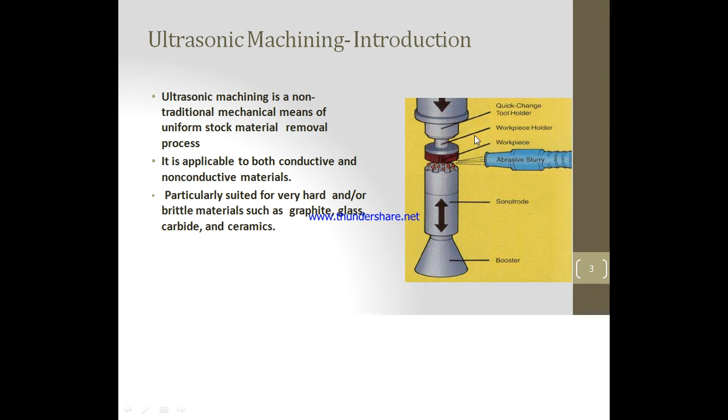Look at this. This is a tool holder. This is the workpiece holder, and this is a workpiece. This is abrasive slurry, which can be placed between the workpiece and the particular job. These are the boosters. This is the sonotrode, which can vibrate in the upward and downward direction. This particular principle is used in ultrasonic machining. How it works and the details of this principle you can see in the subsequent slides.

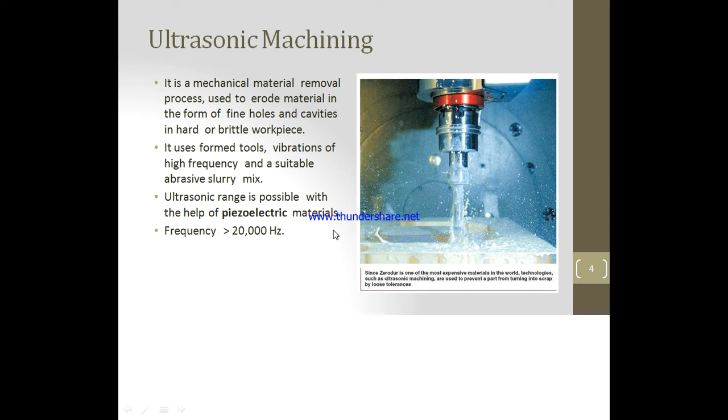So it is a mechanical material removal process used to erode the material in the form of fine holes and cavities in a hard or brittle workpiece. This particular tool holder we also call a vibrator. It uses formed tools, vibration of high frequency and a suitable abrasive slurry mix. The ultrasonic range is possible with the help of piezoelectric materials. This frequency is near about 20,000 hertz.

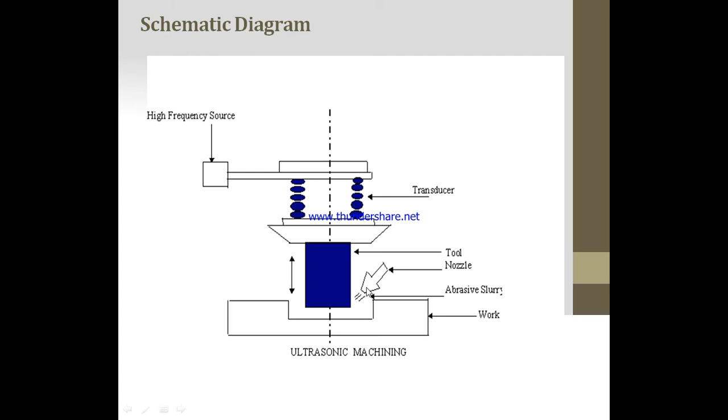So this process is an impact erosion process. For this erosion, we use abrasive particles. Abrasive particles are used for cutting the material. The abrasive particles in the slurry or fluid help with the cutting. Material removal is nothing but an abrading action of the shaped tool, generally of the type of cavity you have to create. It is directly related to the shape of the tool.

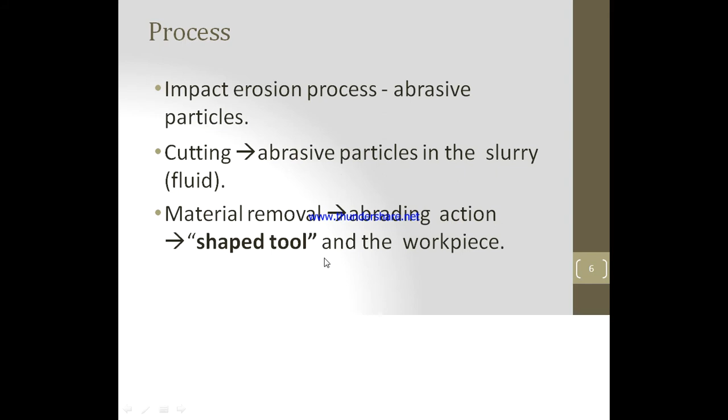Okay, so due to this high frequency vibration, the process is performed by a cutting tool which oscillates at high frequency, near about 20 to 40 kilohertz, in abrasive slurry. The tool is gradually fed with a uniform force. The high-speed reciprocation of the tool drives the abrasive grains across a small gap against the workpiece. The impact of the abrasive is the energy principally responsible for material removal in the form of small wear particles, due to the high-speed reciprocation of the tool.

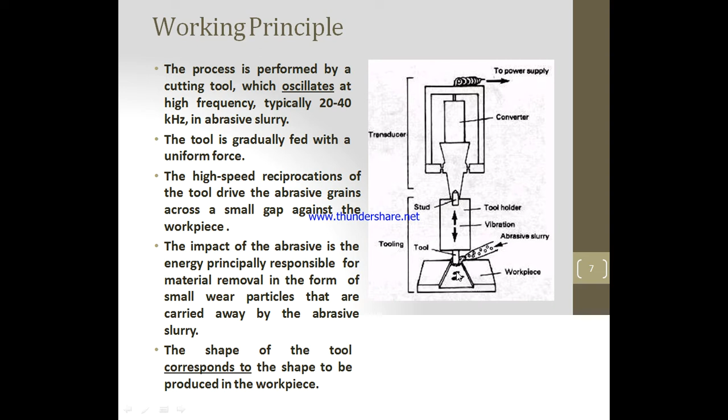The high impact of the abrasive is responsible for the removal of the material as small wear particles, and those small wear particles are carried away by the abrasive slurry.

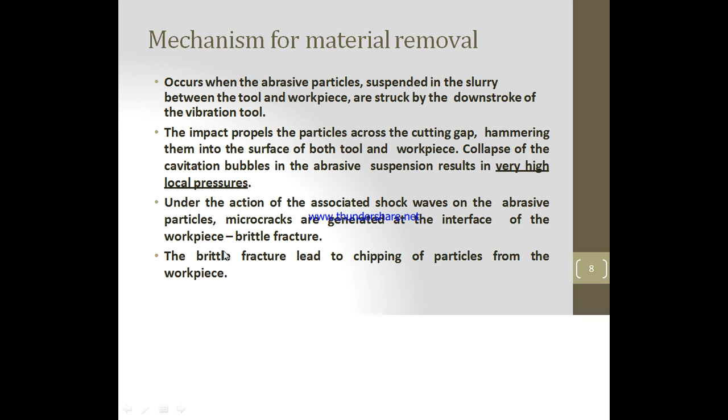So when the abrasive particles suspended in the slurry between the tool and the workpiece are struck by the downstroke of the vibrating tool, the impact propels the particles across the cutting gap, hammering them into the surface of both tool and workpiece. Collapse of the cavitation bubbles in the abrasive suspension results in a very high local pressure. Under the action of this associated shock wave on the abrasive particles, micro cracks are generated at the interface of the workpiece, that is brittle fracture. The brittle fracture leads to chipping of particles from the workpiece.

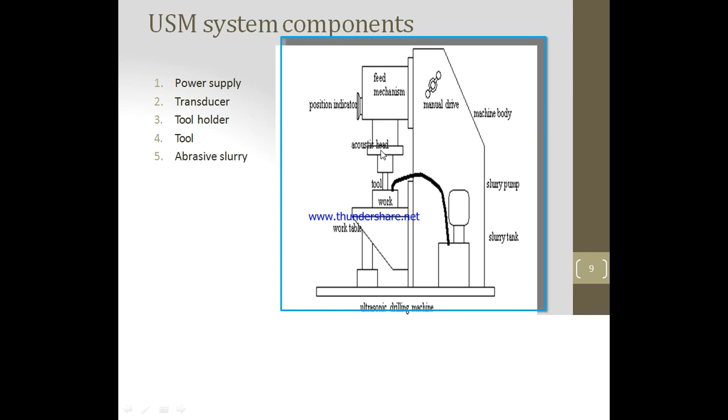So ultrasonic machining system components, the first component is the transducer. This is the transducer which converts the high frequency to the high frequency vibration of this particular machine component. To obtain a high amplitude of vibrations, the length of the crystal must be matched to the frequency of the generator, which produces the resonant conditions. So number one is transducer.

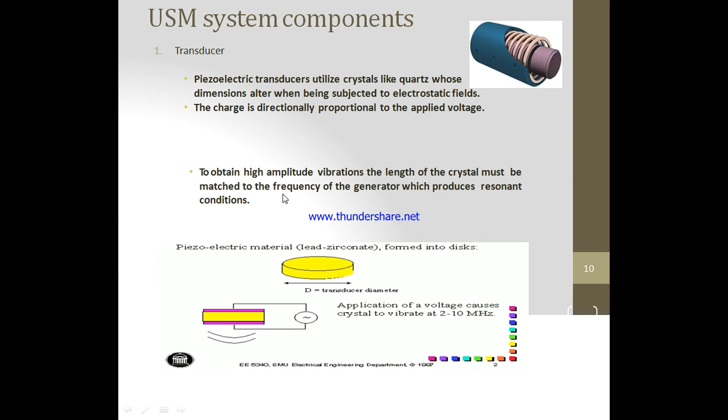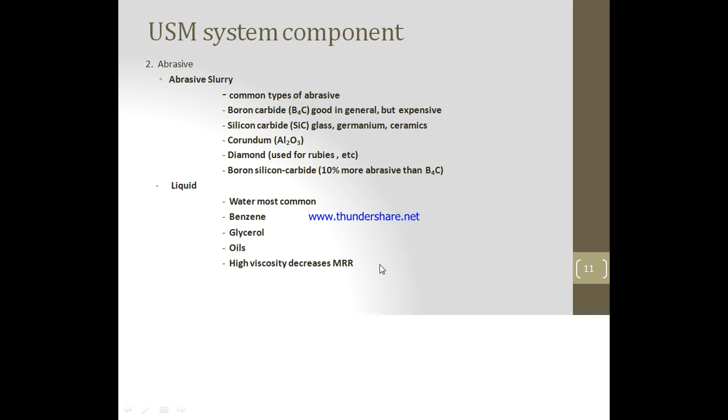Number two is abrasive slurry. A common type of abrasive is boron carbide, that is B4C, good in general but expensive. Silicon carbide, glass or germanium ceramics can also be used as abrasive slurry. Al2O3 corundum is also used as abrasive slurry. Diamond, which is generally used for rubies, and boron silicon carbide, that is 10% more abrasive than boron carbide. For liquid, we can use water, most common, benzene, glycerol, and oils. Oils are high viscosity oils.

So ultrasonic system components, next is tool. The tool material should be tough and ductile. Low carbon steel and stainless steel tool materials can give good performance. Tools are usually 25 mm long. Its size is equal to the hole size minus twice the size of abrasive. Mass of tool should be minimum possible so that it does not absorb the ultrasonic energy. It is important to realize that finishing or polishing operations on the tools are sometimes necessary because their surface finish will be reproduced in the workpiece. Tool and tool holder are often attached by silver brazing.

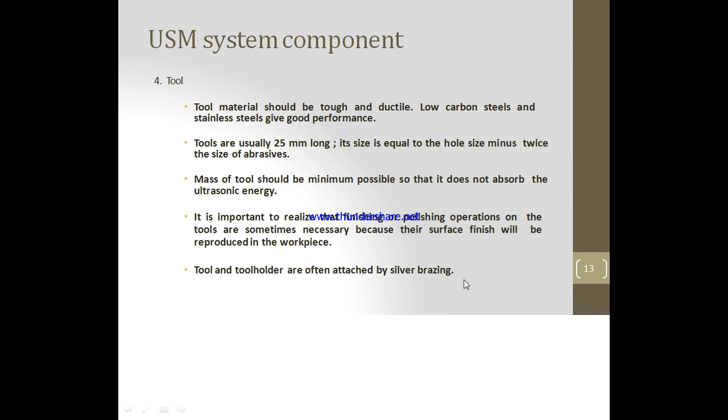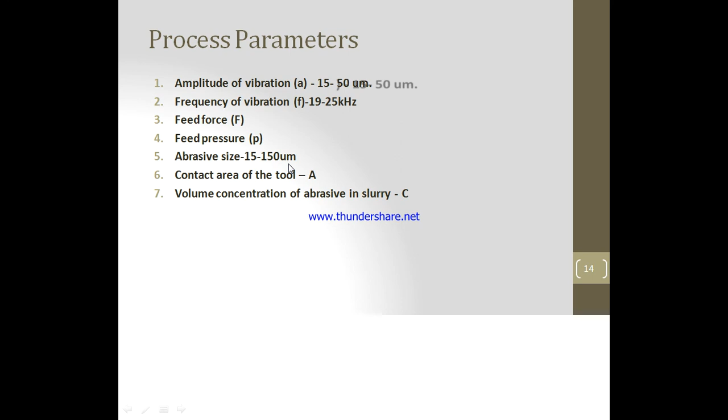So what are the process parameters to be checked in ultrasonic machining? Amplitude of vibration: the more the amplitude of vibration, the more and faster the material removal. Frequency of vibration, generally about 19 to 25 kilohertz. Feed force, feed pressure, abrasive size near about 15 to 150 micron. Contact area of the tool. Next is volume concentration of abrasive in slurry. These are the factors on which the entire ultrasonic machining process depends.

So what are the applications of ultrasonic machining? It can be used for drilling, grinding, profiling or coining, piercing of dies, etc. Welding operations of all materials which can be treated suitably by abrasives. It is used for machining hard and brittle metallic alloys, semiconductors, glass, ceramics, carbides, etc. It is also used for machining of round, square and irregular shaped holes and surface impressions.

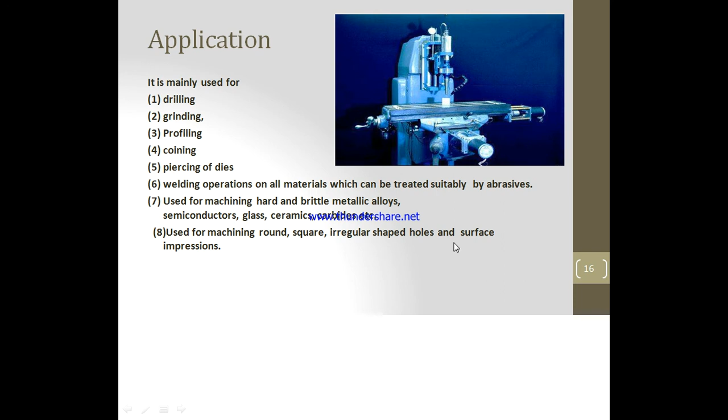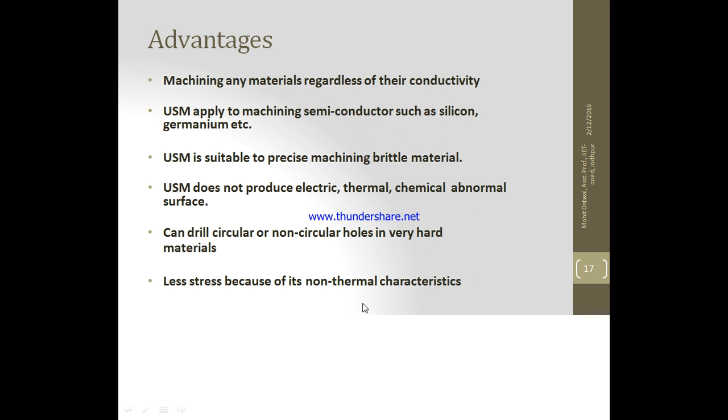Ultrasonic machining has the advantage that any material, regardless of its conductivity, can be easily machined. Ultrasonic machining is applied to machining semiconductors such as silicon and germanium also. It is also suitable for precise machining of brittle materials. It does not produce an electrical, thermal or chemical abnormal surface. It can drill circular or non-circular holes in very hard materials. It produces very little stress because of its non-thermal characteristics.